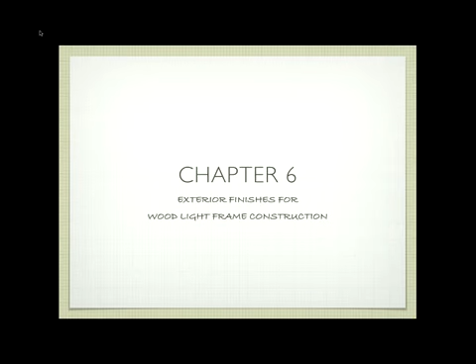So let's start with chapter 6. This is exterior finishes for wood light frame construction. So we spent last week covering what is light frame construction. You had a quiz today reviewing the terms from light frame construction. But the primary purpose of exterior cladding is to protect your building from the weather, right?

We have to find a way to shell our building such that these kinds of conditions don't get from the outside to the inside. So everything that we do is designed around that basic principle, okay? So let's start with roofing.

We're going to kind of go through roofing a little bit here. I'll go into roofing in far more depth at the end of the lecture. But before you can shingle a roof, we need to finish the eaves and the rakes. So when we work our way up, okay, by eaves I mean this part here.

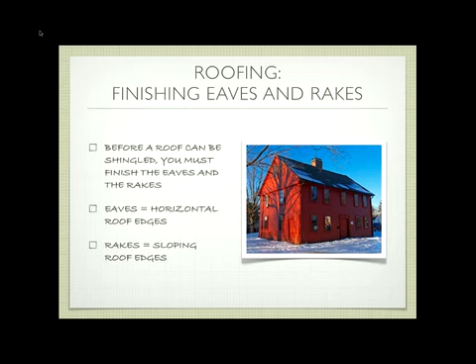Rakes, I mean the pitched part, okay. And so when we layer up our roof, right, we have to make sure that when water or snow or rain falls on the top of the roof, everything that it comes in contact with at the next layer is always underneath the first layer. So if we start all the way at the very top, that's the last thing that you'd apply. It'll make more sense as we go through.

Okay, a little bit of terminology about roofs just so that when we're talking about it, we can be consistent. We have a gable, which is the end here. The diagonal piece is called a rake.

If you have something where 2 slopes of a roof come together and meet, it's called a valley. If the valley is kicked out the opposite way, where you have 2 slopes that meet on the outside corner, it's called a hip. An eave is the flat edge along one side of a roof. So we have a rake and an eave.

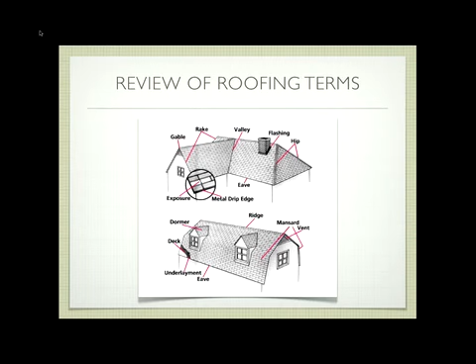These are less important. A dormer is just this little window that pops out. A mansard is just this type of roof. Ridge is what goes across the top. We talked about a ridge board and a ridge beam last week, so it should be somewhat intuitive that they're there. There's always going to be some form of vent relating to the roof, and we'll talk about that as we get into roofing. So this is a roof rake, right?

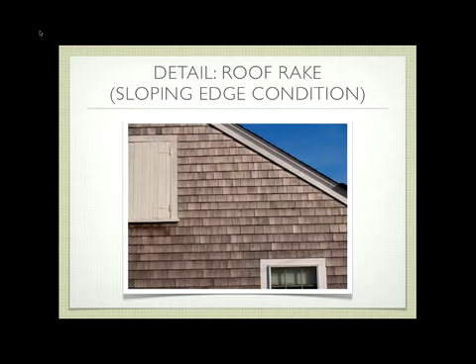Underneath that is the rake board, and then we've got the siding. So if we jump back here, this was our siding. This piece here is called the rake board, the piece that you actually see in terms of trim.

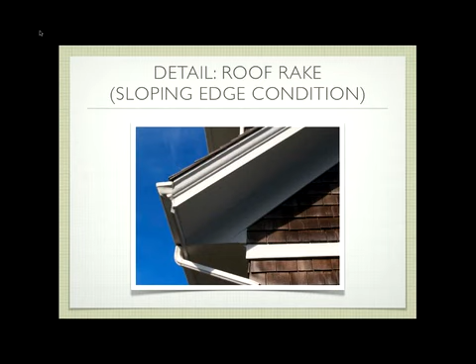Another example here. This looks very similar, where we've got our rake board, and our trim, and finally our roofing. The difference is that this actually extends out as opposed to being flush with the siding itself. So the detail's slightly different—similar, but slightly different.

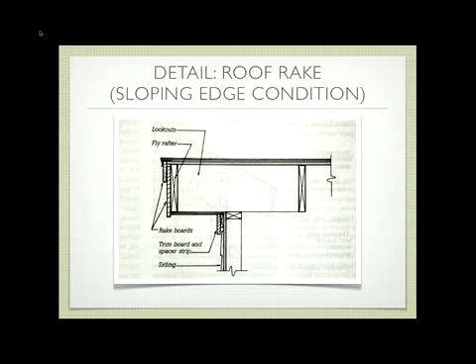In this case, we have something called a lookout that spans from one rafter in out. Remember, if we have a cantilever, we can't just have this piece floating out in space and fall off the building, so we need something to support it. That's called a lookout. We have our fly rafter, the outermost rafter, followed by our rake board and our metal drip edge—virtually the same detail we just talked about.

So when we think about designing roof edge details, the edges of the shingles should be positioned and supported in a way that water flowing over them will drip free of the siding and the trim below. It's always about creating an edge for water to drip off. We never want a condition where water can work its way back up into the roof. That's the key thing to understand.

We're always going to overhang that roof just a little bit, such that if water comes to the edge, it drips off rather than wicking back underneath. The other thing is that eaves need to be ventilated to allow free movement of air, so we don't get condensation and mold and mildew growing inside the roof. There's a variety of ways we're going to deal with that, and we'll talk about each in a little more depth.

So this is the eave, the flat part of the roof that goes along the length of the building. In this instance, we have the same thing where the shingles come down ultimately to a metal drip—again the same piece of flashing, so water comes down and drips off into this little gutter. This is our rafter.

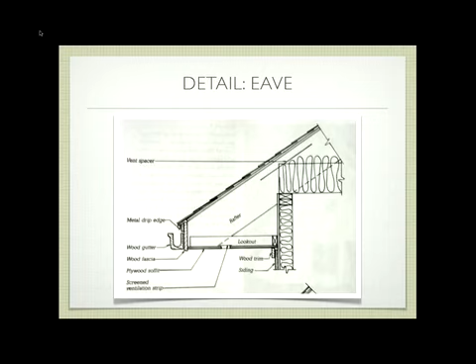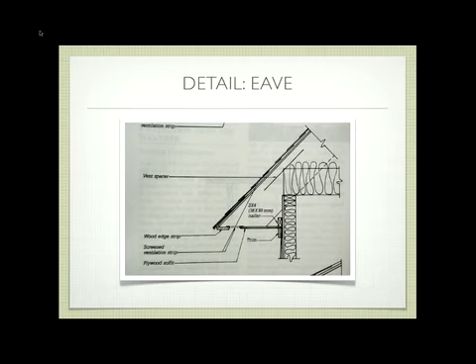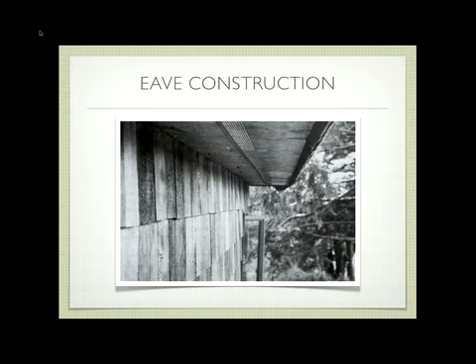This isn't very common—I haven't seen it too much in practice, but it is a way of making the eave. So this is a photograph of an eave. You can see we've got the continuous vent running through, and here our shingles hanging out over the edge, such that the water's going to drip off there. Make sense thus far?

Another example, very similar, same kind of little metal drip edge. This is an aluminum gutter—you don't need a gutter, but there's one in this instance. Side note: if you were up in, say, Lake Tahoe, would you put a gutter on a building? No—bad idea, because the snow is going to rip it off the building.

So if we're down here where we don't get snow, gutters are really nice because we can deal with channeling all the water that comes off our roof, put it into a pipe, and get rid of it. In the Sierras, you have to deal with the water that drips off the roof at the bottom rather than up here at the top because the snow will take that off. So it's important to consider, depending on where you're designing or constructing a building, you have to pay attention to that kind of detail.

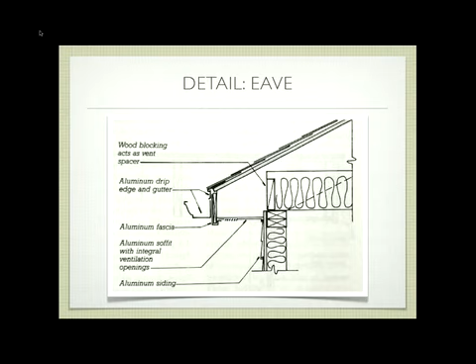In this instance, there's an aluminum fascia here that's wrapping what would be the fascia board. It doesn't really matter whether it's a wood board or it has an aluminum coating, the principles are all still the same. We also have this space here. Recognize the insulation is lower, such that air can get out along the ridge.

So why is that air important? This is called an ice dam, and it doesn't happen so much around here because we don't have lots of snow. But if we are in an area with snow, we have to pay attention to where the heated air is versus where the cold air is.

And it traps water in between the ice dam and the rest of the shingles. What happens is the water gets deep enough so it goes up under the shingles and comes down and drips into your walls, which is really bad because you get mold and water in your walls and all the kinds of things you don't want to have happen. So you have to pay a lot of attention to what happens.

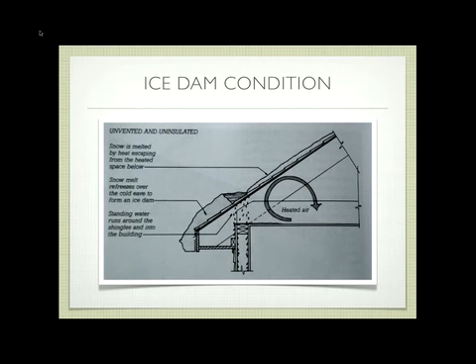So this is the ice dam condition. We've got melted snow above, the ice dam below, and water getting into our building. That's a bad thing, so we want to avoid that. How do we avoid that? If we pay very careful attention to how we insulate our building, we can avoid that.

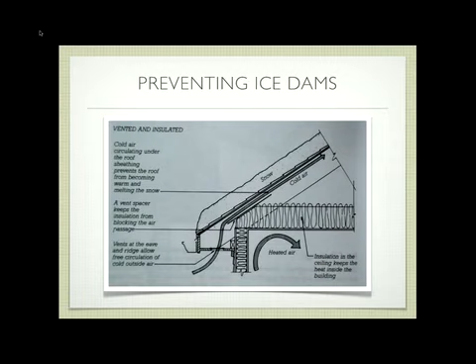In this condition, we have a flat ceiling inside our room, our ceiling's been insulated, our walls have been insulated, containing the heat within the room. But in doing so, we also need to make sure cold air can run all the way up the length of the eave, the length of the rafters, such that it's always cold against the snow. So you've got cold air coming in from outside, running up along here. The snow is always cold, there's no ice dam forming because it's all the same temperature.

What happens if we have a vaulted ceiling of some sort? A lot of times you want a vaulted ceiling, so we're heating the area inside. We've used insulation in here, this is fiberglass batt insulation. But we have a channel that allows the air to go along the length of the rafters, such that it maintains that cool layer, which causes the snow not to melt. So it's virtually the same concept, except the insulation's tipped up so you get the vaulted ceiling.

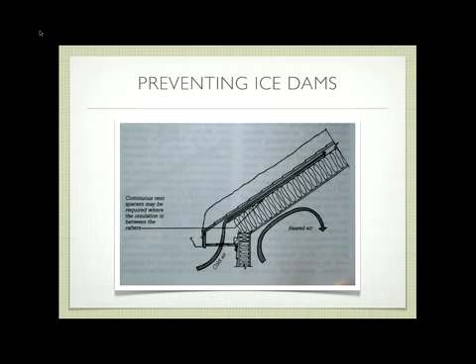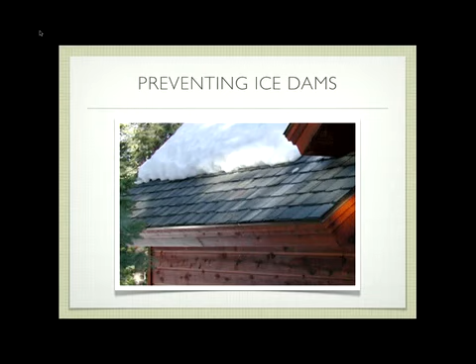The other option, if you run into this trouble and you haven't insulated well enough, is you can run little heated cables along here, and you'll see this in a lot of older homes. You go up in Lake Tahoe and that sort of thing where they haven't dealt with this, poor insulation. They'll run heated wires such that the ice dam can't form because they're actually heating where the ice dam would form, causing the snow to melt. So it's the inverse approach, you deal with the problem this way as opposed to building the building correctly in the first place. But you can do it that way. Problem is, what happens if the electricity goes out? Then you get the ice dam and you have water in your building. So you're relying on a lot of things.

So to make sure we have that proper space running along the interior of your roof sheathing, a lot of times we'll actually nail in these plastic baffles that maintain that airspace and circulation for us. This would be if we're applying the insulation in between our rafters. We don't want to accidentally have the insulation fill up that gap, we need to maintain that space, so we're going to nail these into place.

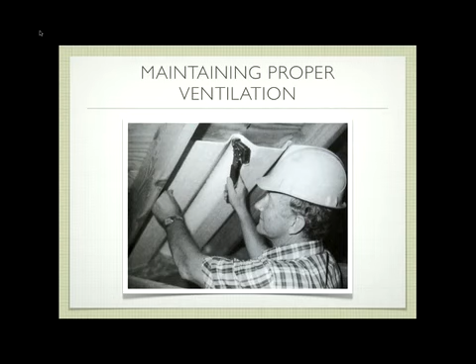Sometimes you'll have a roof vent that occurs at the top of the gable. Sometimes, along the top of your ridge, you'll have a vent built into the shingle system so that air can come in, work its way up and out. Sometimes it has to go out one of these vents, depending on the design of the building. But the idea is that if you have eave vents that allow air in, you need something at the top that allows the air out, so you get that flow and circulation.

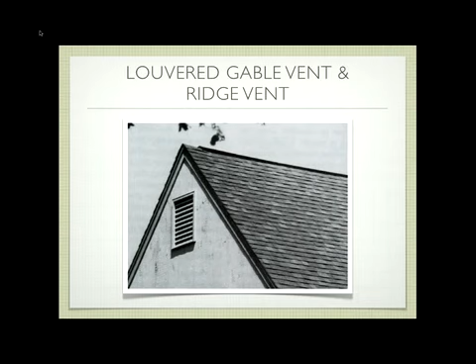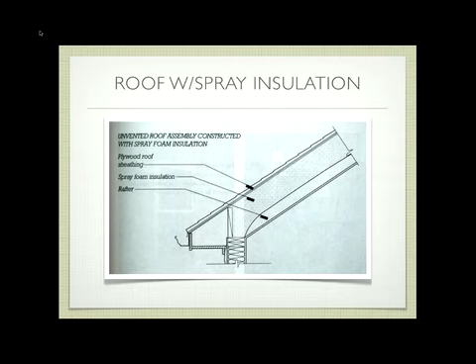A couple other options for insulating. In this instance, recognize we have the warm side here. We're using spray foam insulation, and note that this is coming together. The insulation here passes through into the eave, so we've got a nice joint. There's our hot air—this is all insulated, so everything outside is equally exposed, and there's no place for the ice dam to form. Same thing here, where the insulation is continuous down into the wall, such that this can continue.

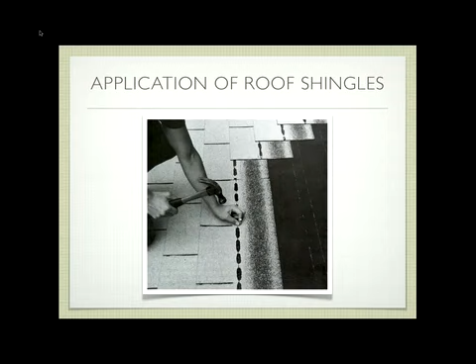Application of roof shingles—we'll talk about this a bit more later on. The thing about roof shingles is that you have to start at the very bottom of your roof and work your way toward the top, because they all overlap. In this condition, we have one layer here; the next layer is applied half on the previous layer and half off, and you keep working your way up. It has to work like that for us to have good water drainage.

Questions so far? No? Okay.

So now we move from the roof and roofing details to how we seal off a window opening. In this kind of lecture we jump around and try to cover a whole bunch of ways to seal up your building, which is kind of how the book does it. So this is installing windows, and there are a couple different methods in terms of how much flashing you do. Generally, if I were saying how to do a window, I would over-flash rather than under-flash—the more flashing you do, generally the better, but it varies a little. The book's example doesn't do very much flashing, so this would be kind of the minimum.

What happens is, as we talked about in the light-wood frame lecture, we're going to frame in our rough opening—like one of these over here, where we have our headers. Supporting our header are our trimmers, then our king studs run along the outside. We have our cripples and a rough sill. This is the rough opening of the window, so we need to figure out how to apply that window into this rough opening.

So if we think about water, water is always going to flow down due to gravity, and it's going to come out—we don't want it to go into the building, we need it to come out at some point. So when installing a window, we have to start at the bottom, because we don't want water to go in. We start at the bottom and flash across the bottom, wrapping it into the sill of the window and also up the sides, usually 6 to 8 inches or so, creating a nice joint. Usually you do it in two pieces and lap the corners—the book doesn't show it that well.

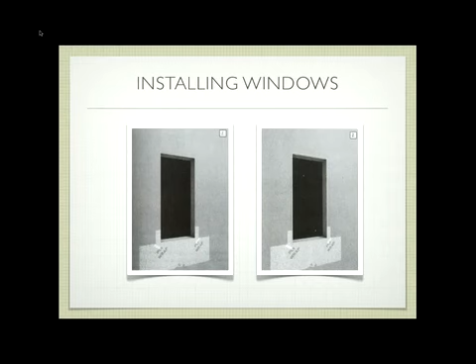After we've done that, we're going to take our window and tip it into place against that bead of caulking. Then we're going to level it and plumb it. And usually in a vinyl window, this happens to be the stereotypical vinyl window. Some aluminum windows are like this. Depends on the complexity of the window.

But usually for new construction, it's going to have these flanges with a whole bunch of nail holes. Once you put this into place, you're going to drive nails through those holes to hold it in its proper location. So a rough opening of a window, like we saw framed in that model or any of the models around here, is usually going to be about a ½ inch bigger than whatever the final size of the window is.

Or I should say, the window's usually a ½ inch smaller than it says it is. So if you order a 4030 window, it's actually a ½ inch smaller than the 4 feet. So you're at 47 and a half instead of 48 inches in width. So that's always going to allow the window to fit in here.

So we've nailed it into place, and then after we've done that, we're going to cover the sides with flashing. And then we're also going to run across the top with flashing. Again, in that order, sides first, then top. So any water that hits the top can roll onto this layer, which comes down here and rolls on top of the layer below it.

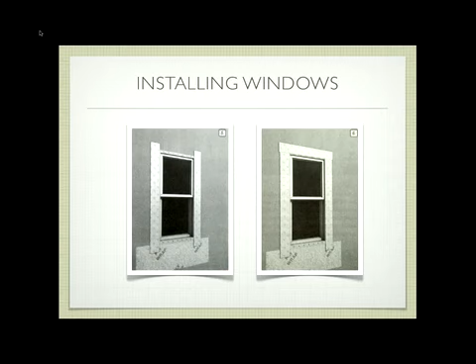So it's always about making sure the water gets pushed further out, away from the surface of the building, rather than getting trapped and coming in. If we did it in the opposite order, the water would go in toward the building. Make sense? So this same thing can be applied to a door. Same kind of flashing around a door. Obviously, you don't start at the bottom because the door doesn't necessarily have a bottom. It depends on the threshold.

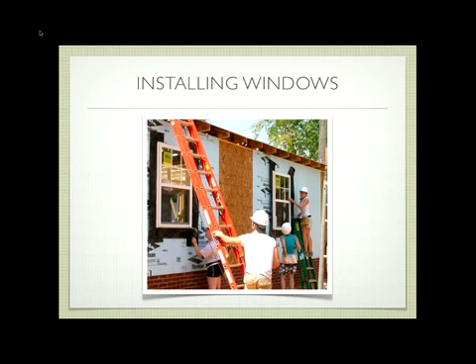Okay, another example here. So this doesn't have any flashing around it yet. Here we've wrapped our house in the Tyvek wrap. We're using Vycor, which is a kind of a rubberized material. We'll talk about it a little bit more in the roofing lecture. But it's a rubberized bitumen. It's kind of like a tar. It's kind of like a cross between rubber and tar. It's kind of weird. It's sticky, but it's a very good sealant.

So they wrap the bottom sill first. Then they're wrapping the sides. Then they're wrapping the top. So it's always in that order. Then they're going to apply the window in between.

Hey, Grant, on that last one, the first one, they don't have anything on the bottom. Yeah. My guess is they do have something, but it's hard to see. It's probably very short. This would make me nervous if it was my job. When it comes to something like a window, that's almost always the most likely place in your building that you're going to have a leak.

If you're going to have a leak, obviously the roof is another big example. Okay, but if you have water beating against something like this, right? We need to make sure that the water gets out. So the more flashing you have and the more carefully you do it, the better off you're going to be long term. So if this does have a little bit of flashing, which it must, otherwise I don't understand why this would be an example, but if there wasn't that little 1 inch, then it would be a big problem,

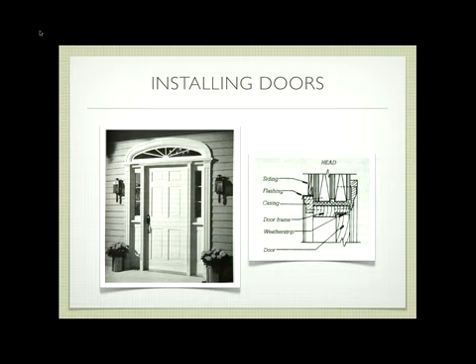Okay. A couple other examples here, right? Again, we've got our trimmer. These are our little wood shingle wedges. I call them shims. The book calls them wedges. They're kind of the same thing. If you go to Home Depot, you're going to buy shims. They don't sell wedges. Whatever.

One going in from either side, again, to fill up that gap. And that gives you some flexibility if, for example, the framers who did the job didn't quite get the trimmers square, right? So you can fill a little bit more on one side versus the other side. It's all practice and skill.

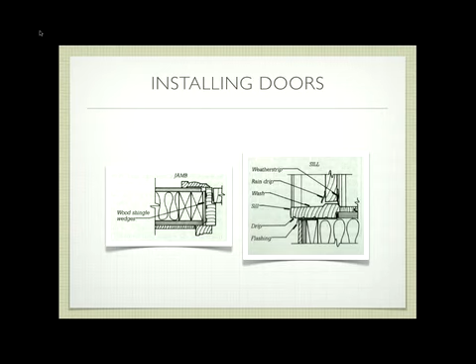Okay, so let's talk a little bit about the siding on the outside of your building. We've got a variety of different sidings. This is again out of the book. I'm just going to run through them so we can make some sense of them. We've got a plain bevel siding, which is basically a board that's been tapered. They lap over each other, right? So we put a nail through. The one below tucks up underneath the one above, such that if water comes down, it's always going to drip off and run all the way down the siding. Same thing happens in the rest of these.

This is a rabbeted bevel. It just means that there's a notch out of the bottom that the other one sticks up underneath. We have our V shiplap, which is the same concept, except it's a flat board that has different notches on the top and the bottom, such that they can lap over one another. We have our cove shiplap, same concept, just a slightly different variant of it. We have our V groove or our tongue and groove here. Again, very similar concept, very common.

This works even though, right, you guys should be questioning this, because this doesn't extend out, it goes back. So if water came down, it would flow back. But because the tongue sticks up, it can't flow back up and over. It's going to still continue to flow down. Okay, so it's a little nerve-wracking there, right?

And this is a board and batten. The difference between this view and the other views is that this has been shifted up into a plan view and cut. So we see our cut studs here. We're looking down on it. There's a board. The batten is over the top of it. If this were in the same orientation as one of these, the water would come in and go towards your building, and that wouldn't work. Does that make sense? So it's important to note the difference there.

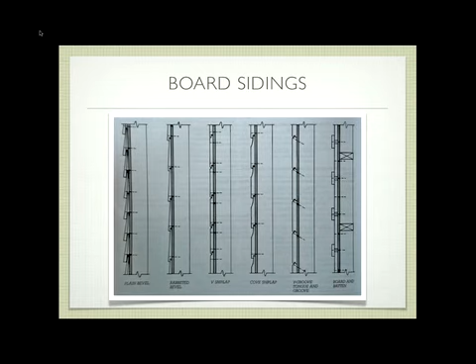So the other thing that's important to talk about when we talk about siding is the idea of using a rain screen rather than just relying on the siding itself. This is something that's very important, especially in stucco, but it is used in wood siding. If you're worried about water penetrating through your siding system, whatever it is, you can actually build a waterproof barrier right at the sheathing level, instead of relying on the siding itself.

So in this instance, we have our waterproof barrier back here. We have our little furring strips here, and we've applied our siding to the outside of the building so that if water happened to get through whatever the siding is, it would run down our waterproof barrier on the inside of that. So it's just a different way. It's called a rain screen. Just another way of doing it. Is there a way out for the water?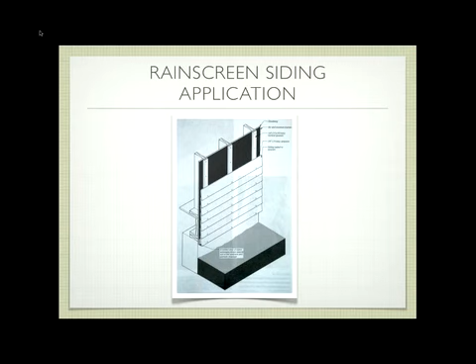At the bottom, there's always a way out. I don't think I have the detail here. It's too hard to see, but there's a gap at the bottom that allows the water to come out from the rain screen. Okay? So then we move on to plywood siding, which is typically T111.

Have people heard of T111 before? You've probably seen this siding on a building before. From an architectural perspective, it's probably the ugliest siding ever. I hate it. But the reason that people really like it is because it's cheap and it goes up really fast, because you're applying big 4x8 sheets.

The thing about it is you're limited in the height, right? It comes in a 4x8 sheet. Maybe if you're lucky, it comes in a 4x10 sheet. So you're limited in height. So if you have a 2-story or 1.5-story building, you have to deal with that joint. And that's what this is dealing with here. So we have one plywood coming up.

We need aluminum Z flashing, which is basically flashing that forms a Z that goes underneath one, comes out, and over the top of the other, so that any water coming down is going to be carried away and onto the front of the next piece down.

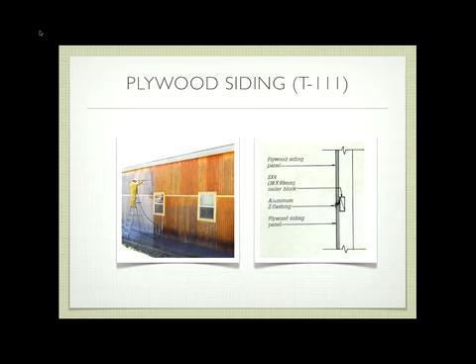So the point is, whenever you are using a plywood siding system like this, there will always be horizontal bands across the building at 8 feet, at 16 feet. There's nothing you can do about it. So that's one way of telling if the siding is, in fact, designed in that manner.

So then we have shingle siding, and shingle siding is exactly what you think it is. It's tapered pieces of wood, one slides underneath the other. The thing about shingle siding is that it varies in its width, and so the vertical joints are always going to be staggered, which is why it works. So water seeping through one of these vertical joints will hit the flat part of the board underneath and still run down. So it's a system like that.

The important things to consider are how you deal with the interior and exterior corners of the building. So if you want a very beautiful building, you're going to go through the labor of doing this kind of a treatment, which means that every one of those corner shingles has to have a slight bevel on it that matches the shingle on the other side. So you're actually cutting this end shingle on a diagonal to match the slope of the shingle on the opposite side.

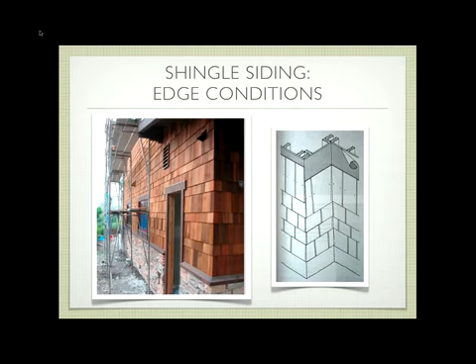Then you reverse the process on the next shingle up. So they always overlap at the corners, but it takes a lot of extra effort to cut all those corners nicely. Same thing happens on an interior corner, except you're cutting that piece in a different direction, so that they can continue to overlap. The result, however, is a very nice clean corner where the shingle bands run all the way around. There's an easier way to do it, but it doesn't look the same.

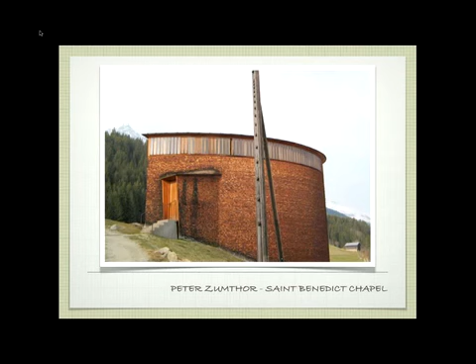So before we move to that, I want to show you a couple architectural examples. This is Peter Zumthor in Switzerland. This is the St. Benedict Chapel. It's a really good example of shingle siding. This is a little church. If I can move forward, you can see it. So again, we've got that lapped corner appearing here.

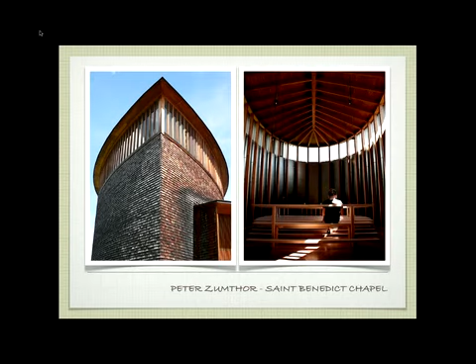The nice thing, since all of the individual shingles are small, we can very easily do this kind of a curved shape. We're not bending the boards themselves. They're still the same normal shingles that we're using. They just happen to follow the contour of the wall itself. This is what it looks like from the inside. Good example of light wood frame construction.

This is it in context. And a little dirt road to get there. I mean, a great architect designs this thing and you have to take a dirt road to get there. Very cool. But this is the Swiss Alps. It's a really nice setting.

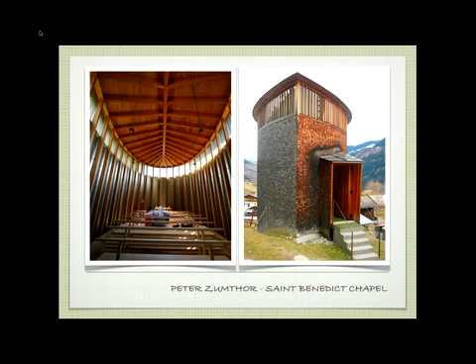Here's an example of the light wood frame construction that he's using. He's playing around a little bit in that he's holding the exterior sheathing off with these little metal brackets, as opposed to keeping it right on. But these are all light wood frame members, except for your beams and your ridge board.

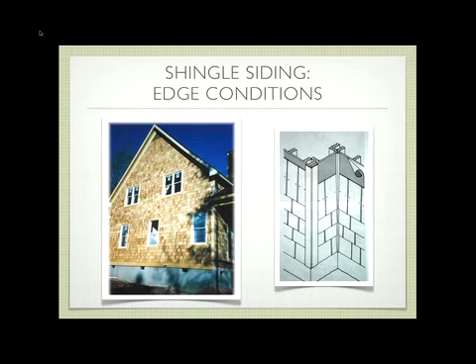Another example is here, in the corner. If you don't want to go through all the effort of lapping and cutting those shingles on the diagonals they need to be cut on, you can put two trim boards in the corner, one in the interior corner, and shingle in between the two. This is a lot easier, all the cuts are straight, and you can apply the shingles much faster, but it means you have these corner boards running up the outside. So when you go around and look at shingle buildings, you'll recognize this as the cheap method, and you'll have an appreciation for the labor involved in doing an actual lapped corner.

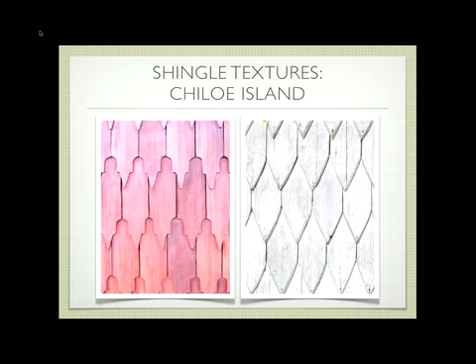The key part of this is that the shingle itself is much longer—one shingle would run from here down to here. So if water fell in this crack, it would continue down along this shingle. You can have this joint here and this joint here, but the joints are always staggered. This happens to be an even stagger; in other examples some are wider, some are smaller. You just want to make sure that two verticals never line up.

Another example of texture—again, we're varying the bottoms of all these. Same concept here. Another variant, and you can see this is virtually endless—there are many different ways you can do this.

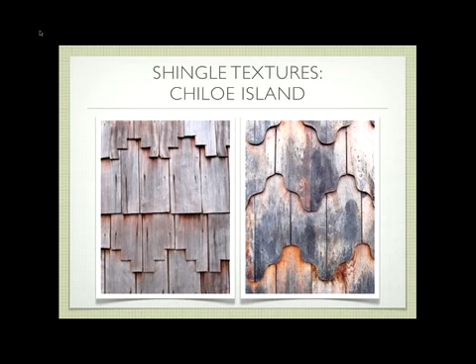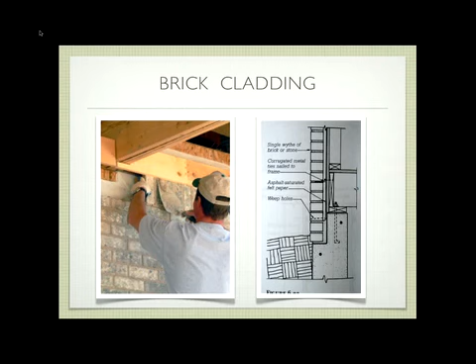This is much like a rain screen, because the mortar used to attach the brick together, like concrete, is permeable to water—brick less so. Water can come in through here, and we need to make sure it can get down and out without causing rot in the building. So there's always that air gap, so water that comes through will come down and ultimately out. There are weep holes to allow that water to come out before it hits the solid brick attached to the foundation. That's a brick veneer building, which is very common.

The other thing that's common is stucco. How many people have a stucco house? Very common around here—California tends to like stucco. Stucco is basically a Portland cement plaster. It tends to be really strong, very durable, easy to make, and it's a pretty fire-resistant material, so that's a good thing. It's usually applied in 3 coats over some kind of wire lath, since you need something to actually hold the stucco to your building.

It's usually chicken wire, and it can be applied by hand or by spray. In this instance, he's applying it by spray - there's his little spray gun. Usually it's finished with a trowel.

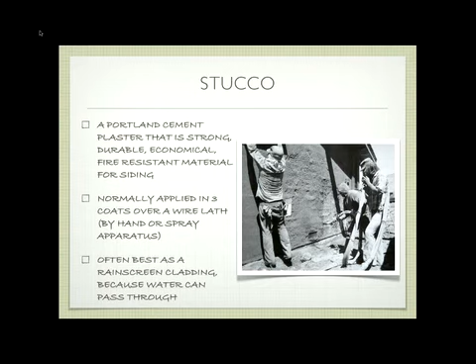The thing about it is, it's better if you use it with a rain screen system - you have the impermeable layer underneath the stucco, because how many people that have a stucco house have cracks in it? Very common to have cracks, so water gets in through those cracks. You need that rain screen underneath that causes the water to come down and out rather than into your building. It works because of that rain screen layer. If you just had the actual plaster, the actual stucco on the outside of the building, water would go through and into your building itself, so you need that rain screen underneath it.

How do you avoid or eliminate cracks in stucco? It depends on the additives that are put into the stucco. It's kind of like concrete - if you don't engineer the building correctly or don't do the mix correctly, you're going to get cracks. If you design the building correctly with proper expansion and contraction joints, you can avoid most cracking. We do live in California, things move around - you're almost always going to get cracks at the headers and that sort of arrangement. It's just the nature of the material.

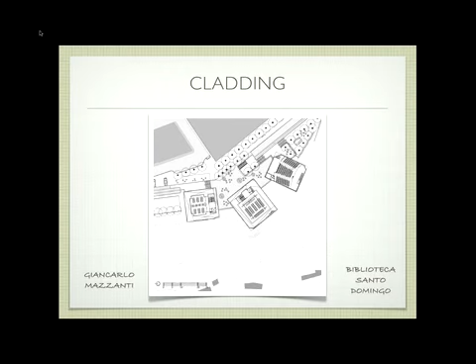So it's a brick system doing the same principles we talked about, but we're varying the architecture underneath. If you were building one of these buildings as a solid brick building, it would be very difficult. But since we have the steel structure underneath that can support the brick cladding, we can clad the building in whatever we want.

In this instance, instead of brick, we could use steel, we could use titanium, we could use anything else. Those could just be brick tiles, not full bricks on top - it depends, I don't know this exact construction method. It could be just brick tiles that are applied. The concept is the same, whether they're thin brick tiles or whether they're full bricks.

Okay, another example - and I'll show you one more. This is stone applied as a veneer. This is again Peter Zumthor - this is the thermal baths at Vals. How many people have seen this project before?

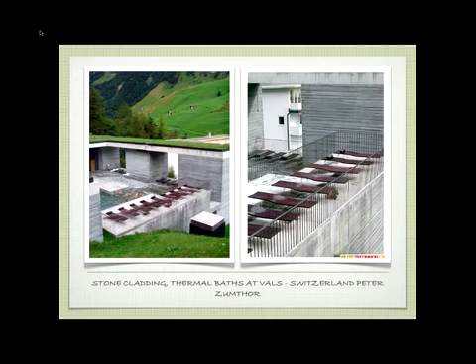A couple people, okay, well I'm glad I'm showing it to you then. Again, in Switzerland, this is the exterior environment. There's a lot of special roof treatments because there's a green roof. All of these are stone veneers applied to the building, so the building inside has its own rain screen that causes the water to shed off.

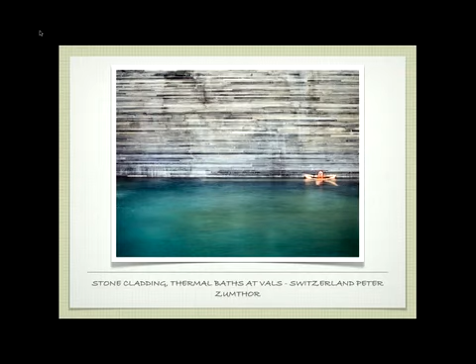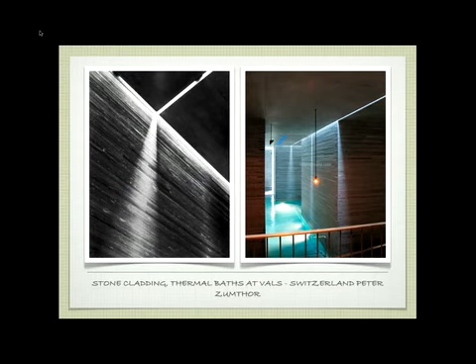This is one of the private pools, with that nice stone contrast to the water. This is how he treats the roof conditions - at every roof edge he's done this really great thing where he's left a little slit of light so it washes down the wall, which really highlights the texture of the cladding. It's an architectural trick - washing the walls with light.

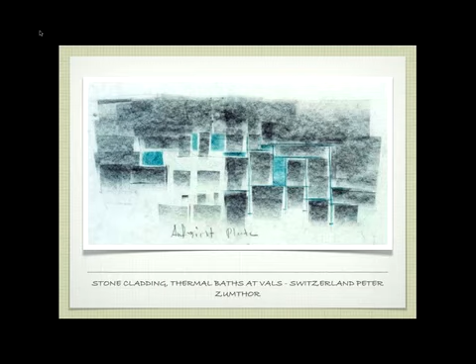Another example inside - when you get into the plan of this building it's quite fun, because you can't get from one side to the other without going through some of the pools. You're coming down, and to get across this area you have to come out - so there's kind of a maze and a pattern. It has a lot to do with the process of taking a bath, but this isn't a design course, so we won't get into that too much. I just want to show you the examples. This was one of the original inspiration drawings by Zumthor.

We'll keep going for a little while because we've got two more chapters to cover - chapter 7, so we're going to keep going. We'll start with chapter 7: this is interior finishes for wood light frame construction. So we just did exterior finishes in a nutshell - now we're going to do interior finishes.

When we think about interior finishes, a lot of what we're doing inside a building is covering up all of the utilities that we need. If we think about a building, one of its major functions is to let us live within it, and to do that we need certain utilities that make our lives easy. That's one of the benefits of living in the age we do, where we don't have outhouses and that sort of thing. So let's start first with the wastewater system.

We're getting into a little plumbing here. If you need to get rid of your wastewater, say you turn on the faucet in your bathroom sink, you need to be able to get that water out into the sewer system or into the septic tank, depending on where your house is. Around here it's usually a sewer system. So when I turn the faucet on in this upstairs bathroom, I need the water to flow down all the way out to my sewer. I need a set of pipes big enough to accommodate however much wastewater I generate, that'll carry that water out of the building.

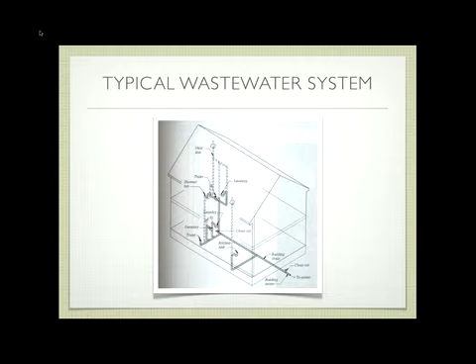The same thing happens in your shower, and the same thing happens with all your toilets. The only difference is the size of the pipe - depending on what waste you're getting rid of, you have to vary the pipe size. As you get further down in the building, ultimately to where you connect to the sewer, the pipe needs to be the largest, because if you turn on all your various faucets at the same time, your sewer system still needs to accommodate all of that water and waste. Make sense? That's kind of how the wastewater system works in your house.

So what about water supply? When we turn on the faucets, we need the water to actually get there. With water, we work in the opposite direction. In the sewer, we're getting rid of water to the street; in the supply, we're getting water from the street or from the well, depending on where your house is, and it's coming in as one line. It doesn't come in as hot water, it just comes in as cold water. That cold water comes in and typically runs very closely to directly into your water heater. Now, in this day and age, we have some variety.

We might have our regular old tank water heater, or we might have an on-demand water heater, depending on how energy efficient our house was. From that water heater, we run two lines, one hot and one cold, to all of the various fixtures in our house, except our toilets. Our toilets just get cold water; we don't need hot water to the toilets.

All of our sinks and showers are going to get those two lines, the hot and the cold. Now, depending on how you design the system, you may run the cold to various fixtures prior to running it with the hot water. Sometimes you run it straight into the water heater and then from there off with a pair, a cold and a hot. It just varies.

When we're building our particular house, before we cover up our walls and put our insulation in, the first thing we're going to do is put our waste system in—biggest pipes take precedence first. Maybe we'll do our HVAC next, depending on who gets the bid first and who gets let in first. After that, we're going to apply our supply water system to get to all the sinks, and then after that, we're going to do our electrical, and move on from there.

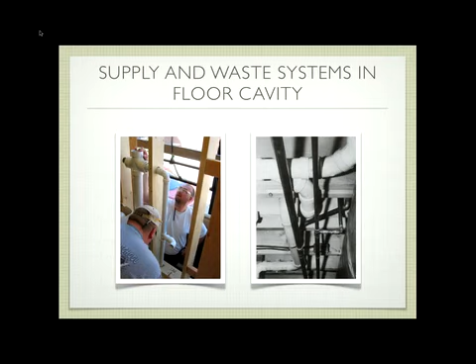Both of these examples are using PVC for drain, which is very uncommon around here—usually it's going to be the black plastic, ABS. Just depends; I don't know why they were using PVC here. Our supplies are typically copper, though we're moving in the direction of plastic, which personally makes me a little nervous. I don't want my supply coming from plastic—I'd rather have it come from copper, whatever. It's just something to be aware of.

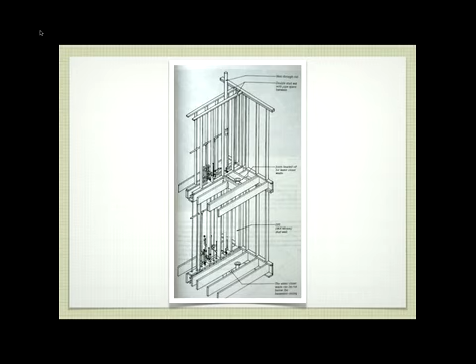So here we've got our framing diagram. These are for toilets—these are our toilet flanges. It's showing us our waste system with our vent that goes out to the top. We've got our various toilet fixtures here, our supply coming into the bathroom, and our drains. I know it's really hard to see here, but you can see it in the book. Later on it shows you how it all fits into the building.

Beyond our plumbing issues, we also have our heating, ventilation, and air conditioning systems that need to go in. How many people know if they have forced air or some other type of heat in their house? How many people have forced air? I do. Okay, so by forced air, that means if you can see a vent in one of your rooms, you have forced air. The idea behind a forced air system is that you have a furnace, which could be in a closet or a garage, and that furnace has a burner.

We'll talk just heat for right now. That furnace has a burner; it heats the air, and then there's a fan that blows the air into your various rooms. Somewhere in your house you also have what's called a cold air return, which takes the cold air and flows it in a big pipe back to the furnace where it gets heated up again and thrown back out. The nice thing about this kind of system is it's pretty instantaneous—you want heat, you can have heat. You go turn on the thermostat, and then you pay your PG&E bill later and are really upset that you've turned on the heat.

This drawing basically illustrates that. We have our cold air returns on our various floors coming down into the furnace system, which is then blowing it out to all of these registers, which is where all the heat shows up. There are some strategies for where you place the particular vents to make it more or less efficient—we'll save that for your energy class when you take that down the road. If we have an air conditioning system, it's very much the same thing, except that instead of the air being heated by gas or electric, it's going to be cooled by the Freon that's run through your air conditioner.

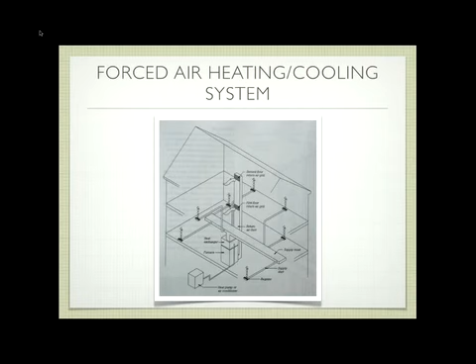Okay? I'm not going to get into the complexities of an air conditioner system. It's just enough to know that you have to have your air conditioner outside because it's exhausting the hot air, right, and bringing the cold fluid in to chill your air on the inside. Anyway, we don't have to get into the details.

If you don't have a forced air system, you might have some form of a hydronic heating system. In this particular instance, there's a boiler. Okay, this tends to be for older houses. There's a boiler somewhere down in the basement. It heats either water or oil. That water or oil flows through a set of pipes up to what are called radiators, which are basically these little, they can be big, set of fins, right, that are usually iron or some kind of steel.

The water flows through those fins and heats the air around it. There's no fans, there's no blowing air, okay? It tends to be either on or off, right? It's also very typical in an older building that at a certain day of the year they turn the heat on, no matter what the temperature is, and then at a certain day of the year they turn the heat off. So it's much harder to regulate. You can't say, oh, I'm cold, let me go turn the boiler on. It doesn't work that way. It's kind of on or off, right?

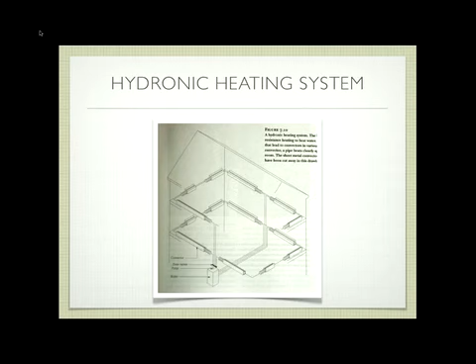And it can take a while for the rooms to actually heat up because there's no fan blowing the air into that particular room. So some of you may be lucky and have what's called a radiant heating system. Anybody have one of these? I wish I had one. Okay? The idea here is that in a radiant heating system, you're applying heat right to the floors. Okay? So you're running it, and there's a variety of ways of doing this.

These can be electric coils that run through a floor, right, that heat up and cause the floor to be warm. They can be a series of oil-filled or water-filled, usually with some kind of antifreeze in it, tubes, right, that run through the floors. You turn on the heat, it heats the water that circulates through the floor, or heats the electric coils, warms the floor where your feet are in contact, and slowly warms the lower half of the room, rather than heating the rest of the vaulted ceiling.

So if, for example, you are in a building where you have really tall ceilings, you're going to want to stay away from the forced air because you're heating a whole bunch of the air that you don't use anyway, and you're going to want to go toward a radiant heating system, where you're heating the zone that you're actually in contact with. The problem with a system like this is there's about a 3-day lag from when you turn it on to when you can actually get the room to be nice and warm.

My own experience with this kind of a system comes from somebody who I used to work with up in the Sierras, and he had a house that had this system in. He goes in there in the winter and does research, and he knew that he had a specialized system. He knew that he had to call in and turn the system on. He had it phone switched. So he could call in, punch a few numbers, and it would turn the heat on about 3 days before he would get there, and then the house would be warm by the time he got there. Okay? So you have to think ahead on a system like this.

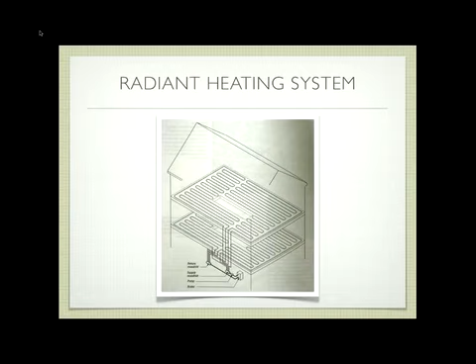If it's an electric system, it can go in the thin set. You put your tile backer down, then you put your thin set, and then you basically impregnate the coils in that thin set, and then you put the tiles over the top of it, right? So it's just a slightly different method, but the same concept. But obviously, if it's wires, it's thin, as opposed to these kinds of things, which are 3/4 inch tubes or 1/2 inch tubes. So you need the concrete around. Any other questions about that?

No. Okay. So we move on from there into the electrical system. We're not going to spend a whole lot of time in the electrical system. It's just important to realize that you're going to have a variety of circuits that come from your main electric panel, maybe your sub panel, depending on how big your house is. If you have metal studs, they're going to be run in this kind of BX wire, like this, into your boxes. If you have wood studs, you can use Romex, which is the plastic sheathed stuff that you've probably seen at Home Depot. And those are going to run into your little boxes, which hold your variety of switches and plugs and that sort of thing.

There are specific codes that tell you where all of these things have to be in your particular house. It doesn't matter for the scope of this class, but it's enough to realize once you put all the electricity in a particular room, you're again taking up a whole bunch of the space in the cavities of the walls, right? So after you put this in, and after you put all your plumbing in, and after you put all your heating, ventilation, and air conditioning in, then you can actually insulate and cover up those walls.

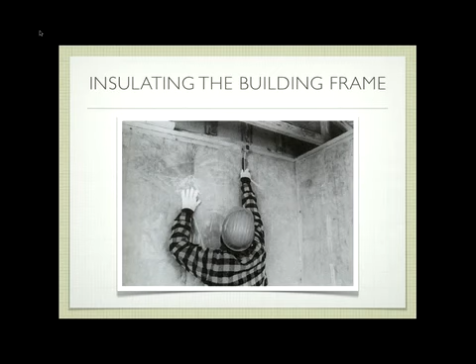So once you've gotten to that point, you're going to roll out either batt insulation into the wall cavities, or you're going to spray in foam insulation. Maybe you're going to put in rigid insulation, more rare, kind of more specialized. And then depending on where you're building, you may put a vapor barrier in, or you may not. So another example here of insulating the floor. This is our fiberglass batt insulation. Everybody relatively familiar with fiberglass batt? Yeah, a little bit. There's an example back there I can dig out at the break.

It's spun fiberglass, and the way it works is you've got all these thin little fibers of glass, and they trap pockets of air. Yeah, it's like this, this pink fluffy stuff. It can be yellow. Not a good idea to touch it with your hands. I mean, I'll touch it anyway. But because it's made up of these really thin glass fibers, they have a way of getting into your skin and irritating your skin. So they're just really annoying.

So if you're going to handle it, I can go over there and I can pet it. It's not going to be that big of a deal. But if I'm actually going to work in it, I'm going to want to have long sleeves and gloves on, and probably a respirator so I'm not breathing in these fibers. And depending on the quality that I buy or how much I spend on it, they may have a kraft face, which means it has a paper face. It may be encapsulated in plastic. It just depends. It may have nothing at all.

If you're doing attic insulation, typically it has nothing. And this is designed for the ability to actually attach the kraft face to the sides of your joists or the sides of your wall, which keeps it in place. Have you ever used the newer recycled cotton insulation? Personally, I haven't used the recycled cotton.

It's probably more expensive at this stage. I'm not opposed to recycled materials except for blown-in insulation, and we'll talk about blown-in insulation in a second. But for this kind of batt insulation, I'd be fine with a recycled material. The thing about the fiberglass is the fibers themselves are small enough such that they trap air really, really well. And that's why we use it.

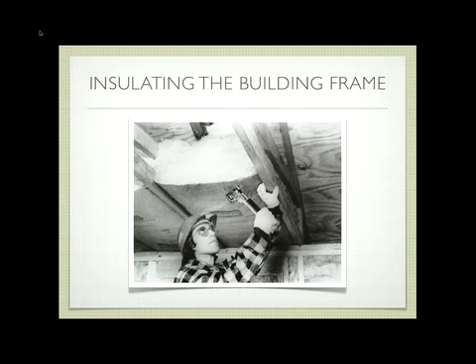Okay? So the idea behind the fiberglass insulation is that you've got this network of fibers, and it traps little pockets of air, and the air is actually what's doing the insulating. It's not the fibers of the glass themselves, it's the air that it traps. That being said, if you get this kind of insulation wet, or you compress it, it loses its insulation value, because the fibers come together, you lose your little pockets of air, it's not insulating anymore. So you have to be really careful with how you handle and work with this insulation.

Here we are up in an attic, where we're actually putting the fiberglass batts. Same thing. These are not kraft faced, nor are they encapsulated. They're just basically the raw material. They're putting these in between the joists. If you climb into your attic and it's been recently re-insulated, you're going to have these batts that were initially put in, and you probably have batts running in the opposite direction, covering them up.

This was a project I did on my own house, maybe 3 or 4 months ago, because I got tired of paying way too much for my PG&E bill.

Right? Yeah. You put the kraft paper facing the living side, if you're installing before you put the sheetrock in, yes. If you're installing afterward, typically you wouldn't get any face at all. You just have the unfaced rolls, and you use the rolls. There's no real reason for the faces at that point. The face is just to hold the insulation in place. Any other questions? No.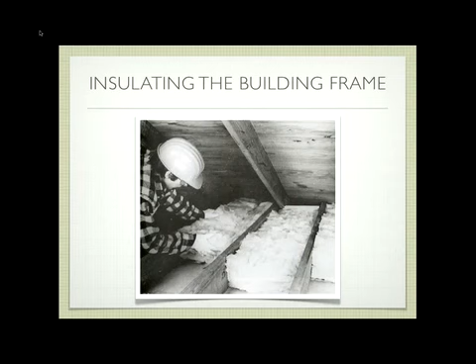Okay, so this is putting it in underneath. Same concept. We're tucking it in between our joists. The nice thing is that it comes in standard width, so you have 16 inches on center, and the fiberglass batts are designed to fit in between those. If you have 24 inches on center, you can buy that.

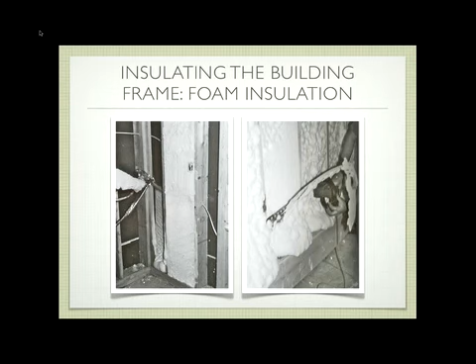You can also do spray-in foam insulation. In this case, they're actually spraying it with a gun. It's a mixture. It foams up, and then you shave it off. So this is the knife shaving it off so that it's flush with the edges. Just another method of doing it. Not that common around here. More common, I'd say, up in Canada. Just depends on who's around and who's doing it.

The last type is blown-in insulation, which is usually ground-up newspaper treated with a fire retardant. Very common, very cheap to install. Typically only in attics, not in walls. I do not like this stuff at all because I've worked in plenty of buildings that have this done after the fact. It's great because it's a uniform blanket. You can get a couple feet in your attic, and it's kind of continuous all the way along. There's no joints in it. There's no place for air to infiltrate.

But if you ever have to go in the attic to do any work, it is a nightmare, because you're wading through these couple feet of this insulation. You're kind of crawling through it. You get covered from head to toe in it. It's really bitter tasting, so you have to wear a mask. It gets all in your hair and in your eyes. If you set anything down, it disappears completely. I've lost flashlights. I've lost tools. If you accidentally drop something, it vanishes, and you can never find it. And then you're stuck wading through, and you end up with a little rat body that died a while back, and all that kind of stuff. It's just gross. But it's very common.

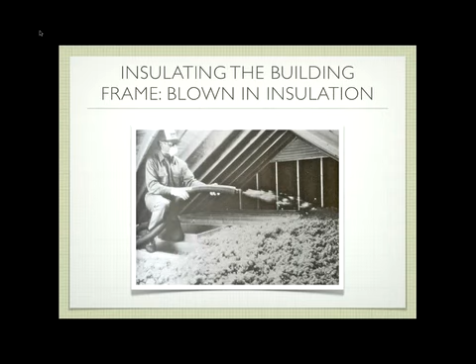It's very efficient in terms of how it's insulating. So just because I don't like it, it's coming from the fact that I don't like working with it. But it is actually a very efficient way of insulating your attic. Just don't ever crawl in there again, or hire somebody else to crawl in there.

Okay, so we talked a little bit about insulation here. This is R19 insulation, which is typical for a 2x6 wall. This symbol is always for the insulation. And when we look at insulating, we're going to fill in the cavities in our wall, but we're also going to want to fill in between our joist and our rim joist here, such that there's no break in the insulation.

Okay, and we're going to continue all the way down. Also at the foundation, we're going to continue insulating, and then depending on the particular treatment of the basement, you may continue if it's a basement, or you may stop and insulate the floor if you have a crawl space, or what have you. Note that there is always that ventilation gap at the top so that the air can come up and out the top. That's important, and it's always going to be there.

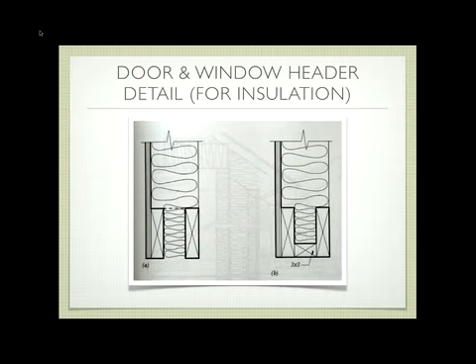If you're dealing with a header, if your header isn't solid and it's two separate 2x materials, or if it has a block in between, you're going to insulate in between. The point is, if there's a space in your wall that you can insulate, you should insulate it. That's basically the principle of insulation. These are just various corner examples. It's just showing you that I'm actually putting insulation all the way in every space that I have.

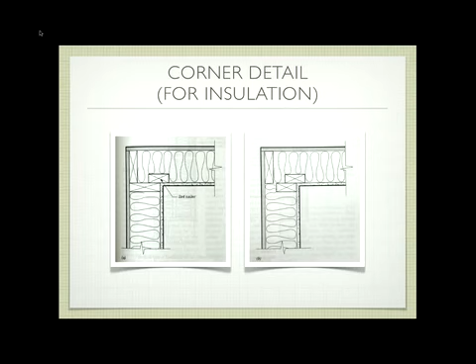If you use the other framing method where you have a framing member here and also here, you're still going to put insulation in the gap from the outside before you cover it up, if you're doing a good job. If you live in a really cold climate and you can't get enough in your R19, you may thicken up your walls and do another interior non-load-bearing wall just so you can add insulation. So the thing about insulation is you need the thickness to get the higher insulation value.

So R19 is your typical 2x6 insulation. If you move up to 2x10, it goes to R30. You go higher than that, you're going to go into R40, something like that. So you can combine the R values together. What's your R13? R13 is 2x4 walls. So it's not really 2x4, right? It's 3.5 or whatever.

So if you're putting the blown-in insulation in, you still have to make sure that there's nice airspace that allows this air to flow up in the attic. That's really, really important, and all too often doesn't happen. This is an airtight barrier. We're not going to deal with this too much, if you're trying to get your building airtight from the outside. Typically around here we tend to have our buildings breathe more, so we don't do that. Depends on where we're building.

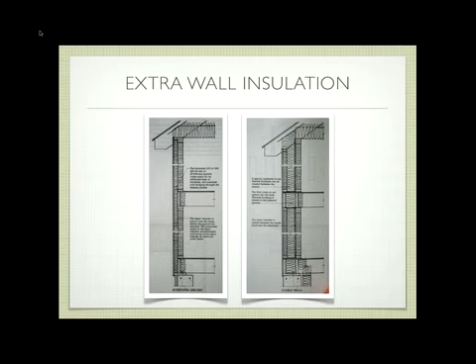So this is a good question. What you were asking is, in this particular instance, this is if we had a wood frame building where we're putting our own rafters in. This is much less common. I think I heard a statistic saying 75% of the buildings going up today have roof trusses like this. If it is a roof truss system, it's very much the same way that you're going to worry about insulating. The thing is, in this instance, the ceiling is flat, so you're not dealing with the insulation going up like in the other slide. We're running right across the ceiling, so it's treated virtually the same as if it were just the ceiling joist, and we're filling in the insulation.

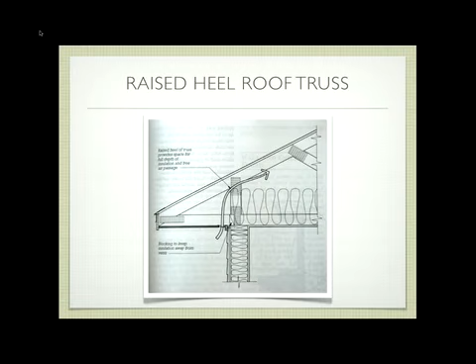Same thing happens, only this time it's a truss. We just have to make sure the insulation doesn't extend too far so that we still have a little bit of airspace. It's pretty easy to judge because usually these are 2x4s, so as long as you don't cover up that last little bit of the truss, you're safe in terms of insulation. But you still need to insulate with it.

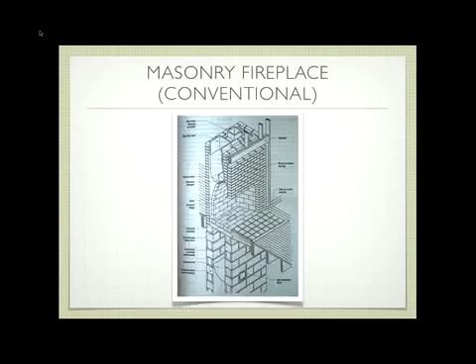Interior door installation is virtually what we talked about before, so we don't need to go through it.

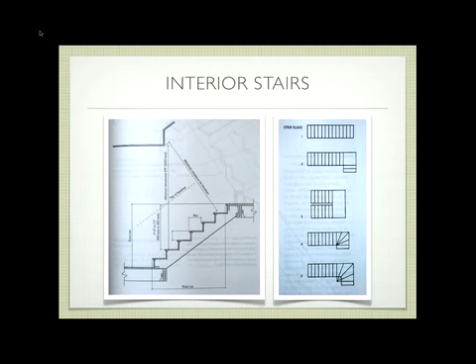Interior stairs—important terminology is this, that you have a stringer, and a variety of different types of stairs. I'm not really going to test you on stairs, I just want you to be aware that stairs exist in buildings. A little bit more terminology: a tread is what you can put your foot on. A riser is what you stub your toe on, exactly.

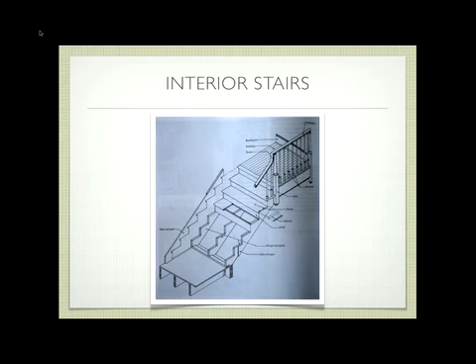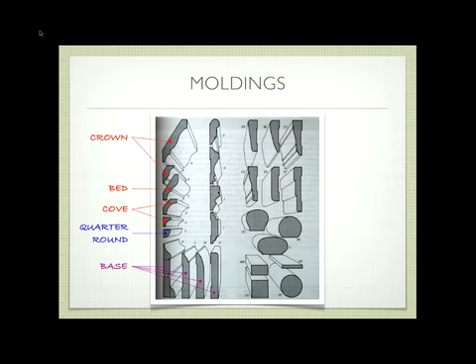What's the purpose of chair rails? In the old days, chair rail was a nice solid strip of wood such that if you scooted your chair back, the back of the chair wouldn't dent the wall. That was the original purpose. It has evolved into just being a decorative piece. So if we walk back to this wall, it has a nice little ugly chair rail they conveniently put on here. It's a little bit low in my definition of a chair rail, but it is here. They put it on for decorative purposes, not worried about you backing up into it. But this ends up being very common.

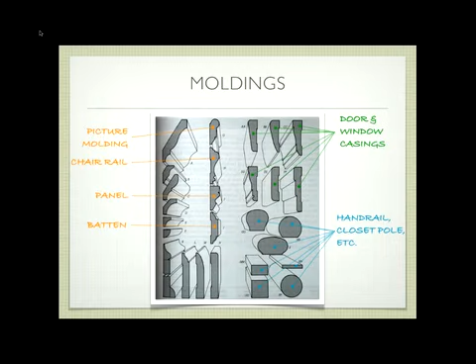This room doesn't have base, so we don't have any base and we don't have any crown. It's higher over there—oh, is it higher over there? Yeah, real good construction job in this class. Okay, so these can be made from solid wood, or they can also be engineered wood, like medium density fiberboard. Just depends.